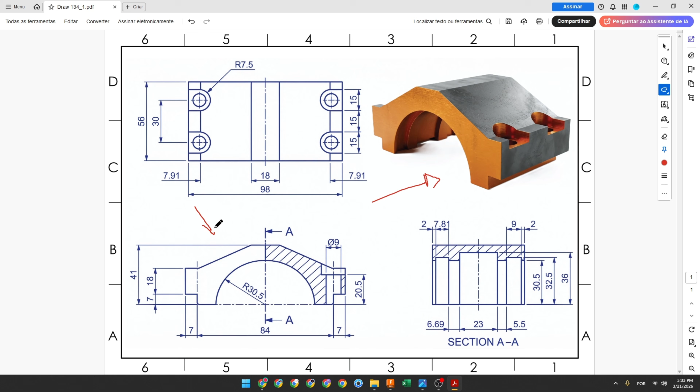The first step to create this part, we will select the front plane and create this sketch. Here will be the midpoint. And the first thing that we'll make, we will create this arc. The angle between this point and this point here is 90 degrees.

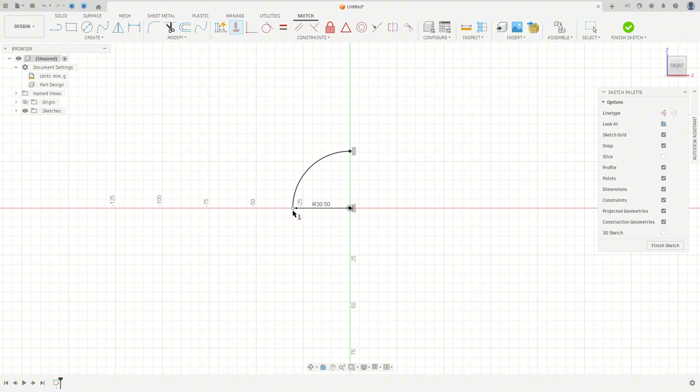So open Fusion, go to create a sketch, select the front plane, go to create, select arc, center point arc, click here in the midpoint, make an arc here with 30.5 millimeters of radius. Go to constraint, select horizontal vertical, select this point and this one, this point and the midpoint.

And now we will create these three lines, this one, and this one. This line here and this one has 7 millimeters of length, and the distance between this line here and the midpoint is 84/2. So select line, click here and this point, make a line here.

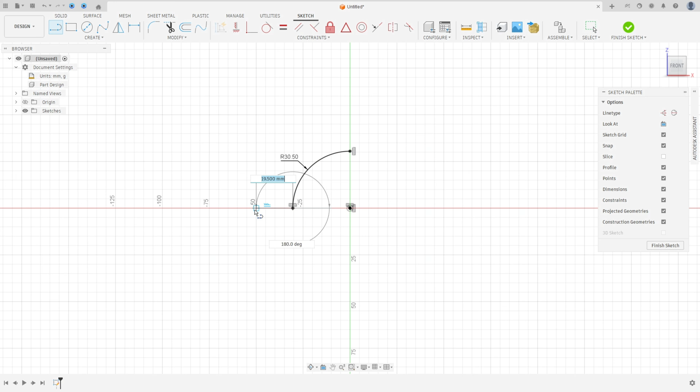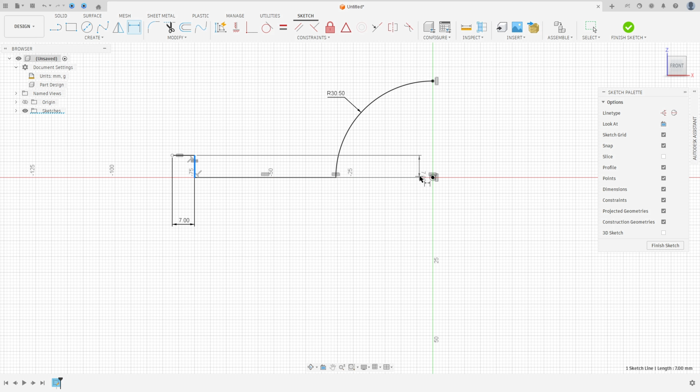Go to constraints and select equal, select this line and this one, and go to dimension. The length here is 7 millimeters, and the distance between this line here and the midpoint is 84/2.

And now we will create this line here with 18 millimeters, and we will create this line here, and the distance between this point here and the midpoint is 41 millimeters.

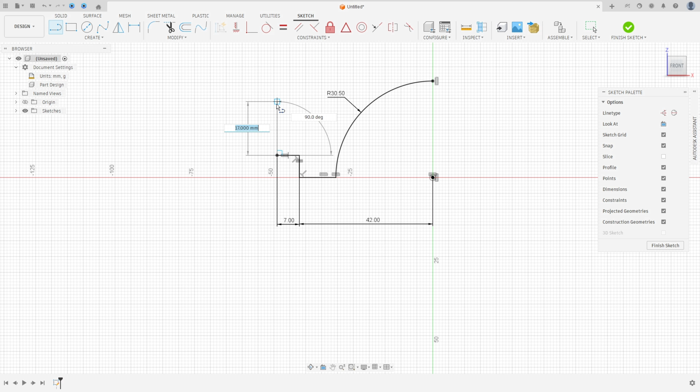So select line, click here on this point, 18 millimeters, and make a line here, and go to sketch dimension. The distance here is 41 millimeters.

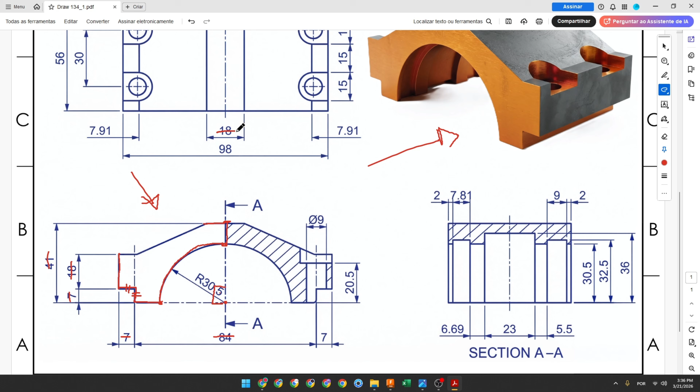And now let's create this line. This line has 9 millimeters. And this line here has 7.91 millimeters. And let's create this line here.

So select the line, click here in this point, make a line here with 9 millimeters of length. And select the line, click here in this point, make a line here with 7.91 millimeters. And create a line here.

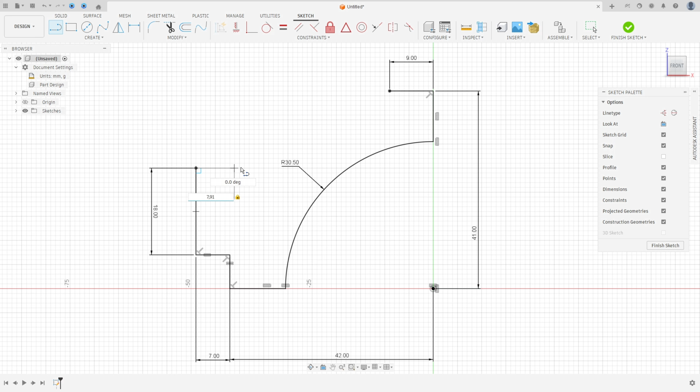Now go to mirror, select this sketch here, and the mirror line, select this one and press OK. We made this sketch. So finish the sketch here.

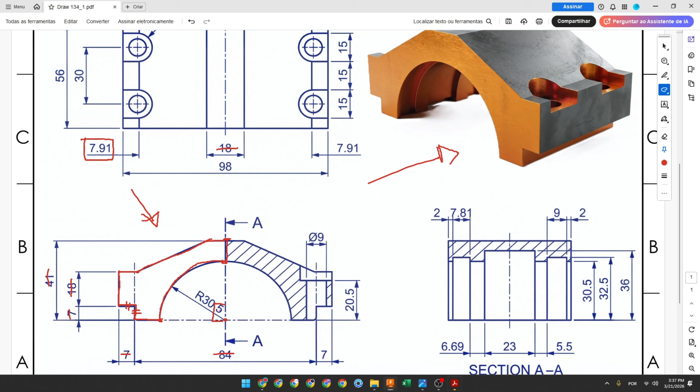We need to extrude this, and we will extrude this 56 millimeters. So go to extrude, select this profile, and the direction symmetric, measurement whole length, and the distance here 56 millimeters, and press OK.

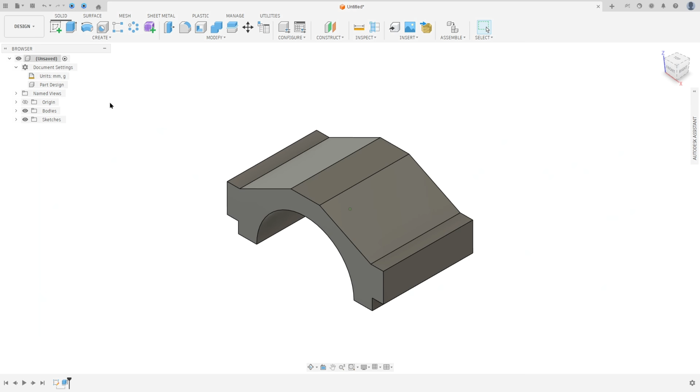And now we will create this cut here. So to create this cut, we will go to create a new sketch and select this face here, and go to create, select project include, project, the selection filter, select body, select this body here and press OK.

And select line, a construction line, make a construction line here in the center. I will hide this body a little bit. And select the line again, make a construction line here in the center.

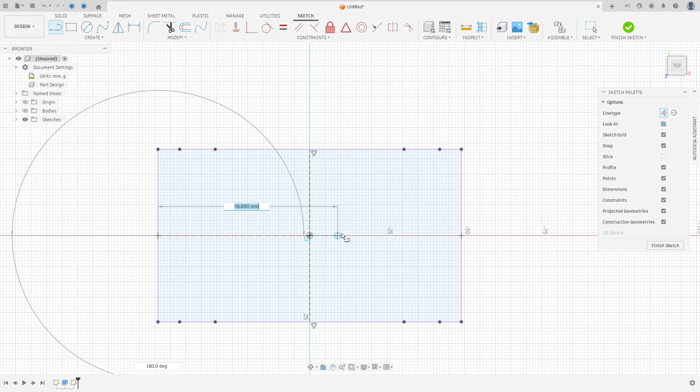And now we will create this sketch here, okay? And this circle. This circle here has 9 millimeters of diameter. And the distance between this circle and the midpoint here, or center line, is 15 millimeters. And the distance between this point here and this edge here is 7 millimeters, okay?

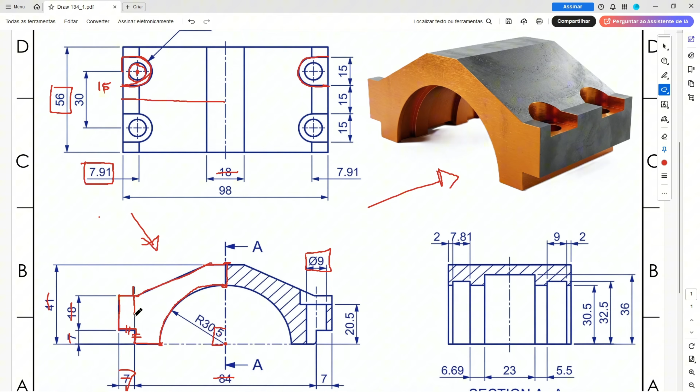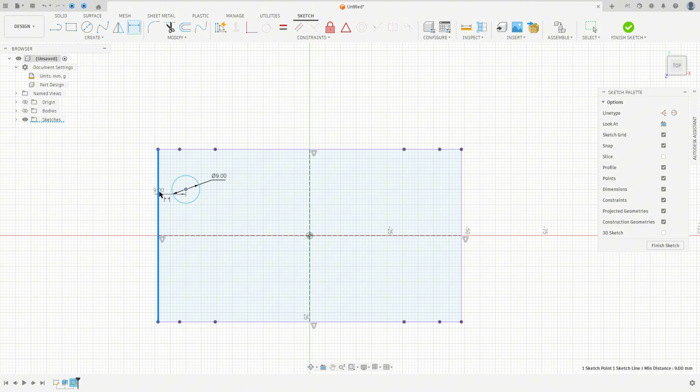It is the same line here. So select the circle, make a circle here with 9 millimeters of diameter, remove the construction line type, and go to sketch dimension. The distance here is 7 millimeters. And the distance between this point and the center line is 15 millimeters, okay?

And now we will create a line here, and we will create an arc and another line. The distance between these two lines is 15 millimeters, and this arc here is concentric with this circle.

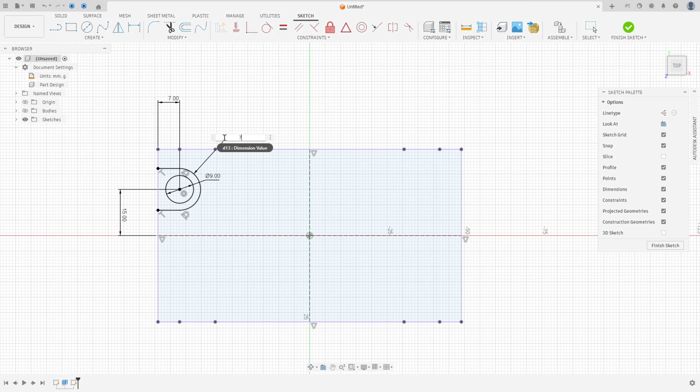So select the line, make a line here, make an arc and another line. Go to constraint, select concentric, select this arc and this circle here, and go to sketch dimension. The radius here is 7.5 millimeters, okay? Just to check the dimension, the distance here is 15.

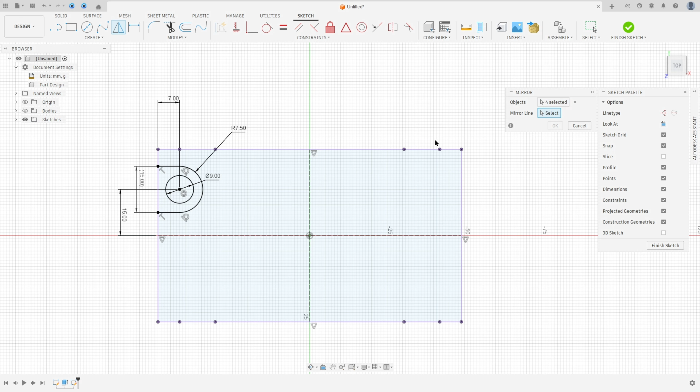And here, go to mirror and select all this profile. The mirror line, select this one and press OK. And select the both sketch here again. And go to mirror.

And the mirror line here is this vertical line. Press OK, and now finish the sketch.

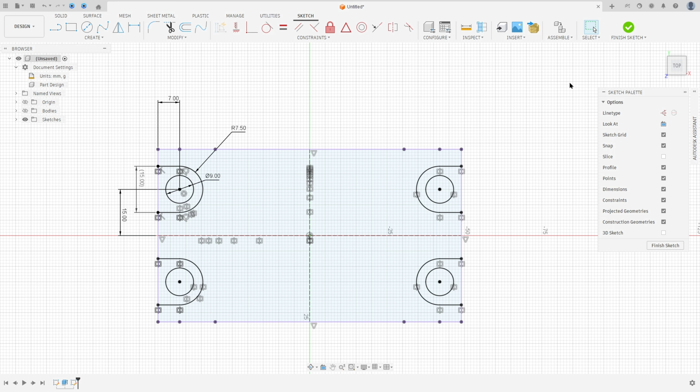Show this body here. Go to Extrude. Select this profile. Let me hide this a little bit. You can select the circle too, okay?

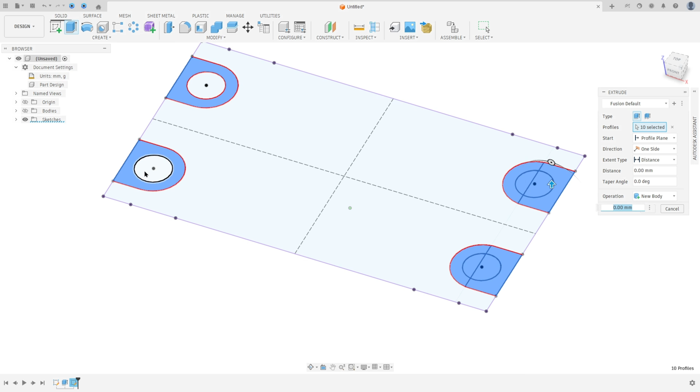And here the direction will be two sides. To this side here, we use 10 millimeters, just to cut through all here, or you can select all.

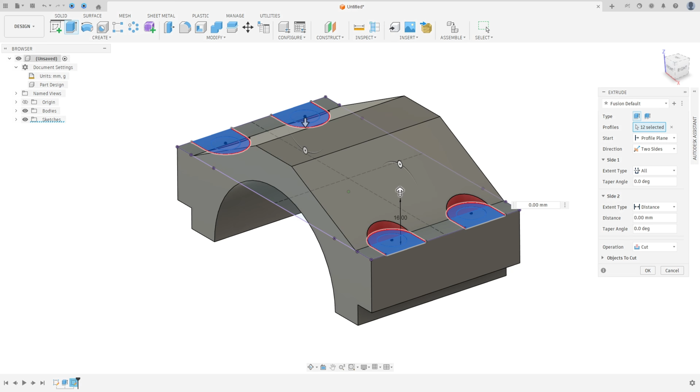And the side two will be 18 millimeters plus 7, it is 25 millimeters minus 20.5, okay? So here is 25 millimeters minus 20.5.

And press OK. Operation cut. And go to measure, select this face here and the bottom face. The distance here must be 20.5 millimeters.

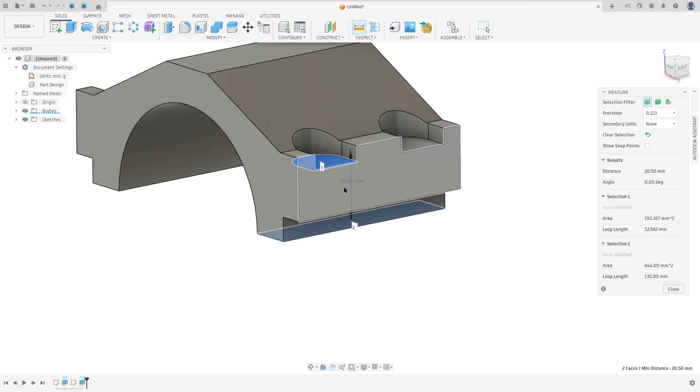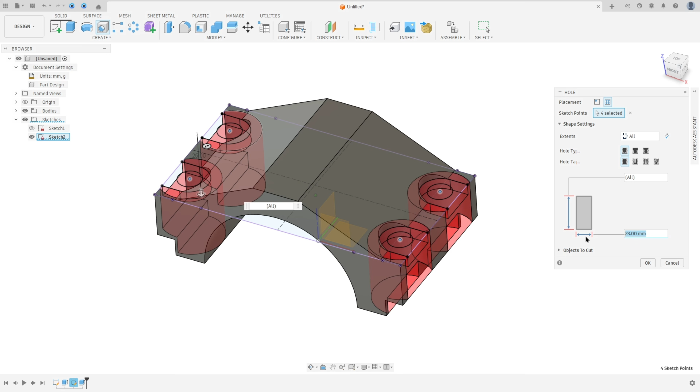Okay, and now show the sketch 2 again and go to hole and select this point here. The extent all, the hole type simple, the diameter here 9 millimeters. And press OK.

Hide this sketch. We made this one, okay?

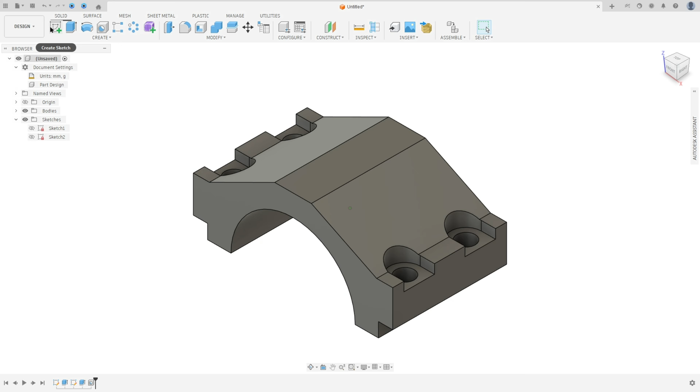And now we will select the right plane and create this sketch here. So go to create a sketch and select the right plane.

Go to create project, include project. The selection filter body, select this body here and press OK. I will hide this body. We have this profile for reference.

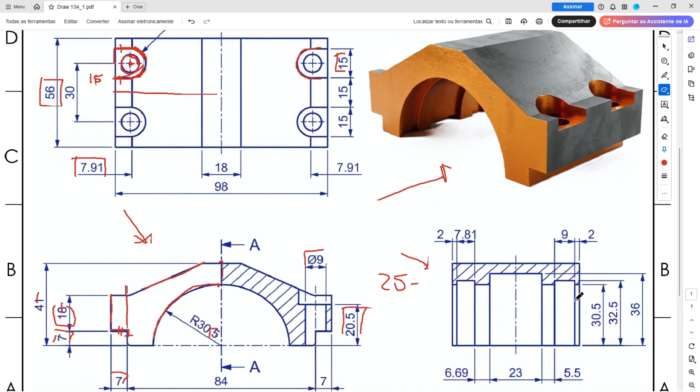And now we will create this sketch here. So we have a line here and another one here with 2 millimeters of length. And the distance between this line and the midpoint is 30.5 millimeters.

So select line, make a line here with 2 millimeters, create another line here with 2 millimeters. Go to constraint, select equal, make these two lines equal, and go to horizontal vertical, select this line and this one. Go to sketch dimension. The distance here is 30.5 millimeters, okay.

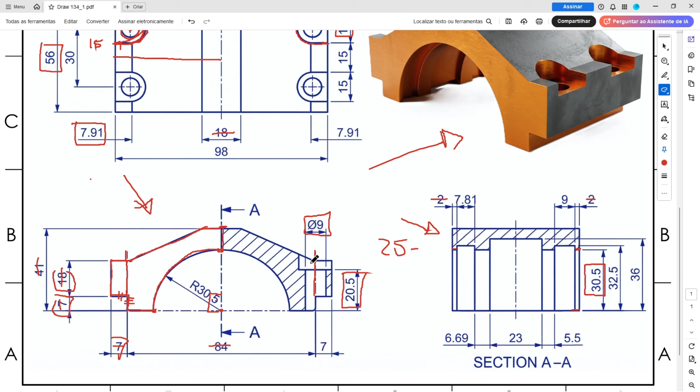And now we will create this line here, this one and this one. And the distance between this line here and the center point here is 32.5 millimeters. And the length of this line is 7.81.

So select line, click here. The distance here is 7.81 millimeters.

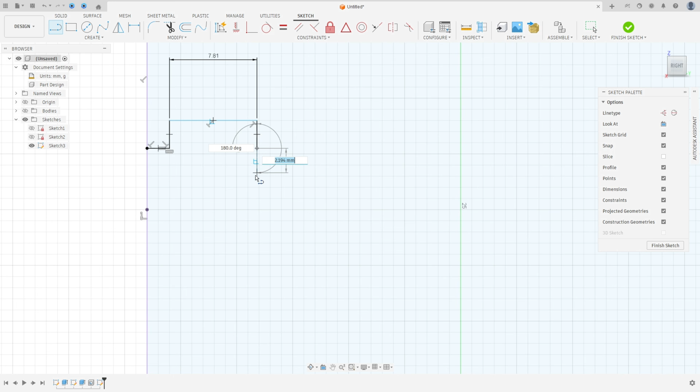Create another line here and go to sketch dimension. The distance here is 32.5 millimeters. Go to constraint, select horizontal vertical, select this point here and this point here, okay.

And now we will create this line. This line here has 6.69 millimeters. Okay.

And now we will create this three lines here. And this line here has 23 millimeters. And the distance between this line and the midpoint is 36.

Go to constraints, horizontal, vertical, select this point and this point here. And here we will create a line with 5.5 millimeters.

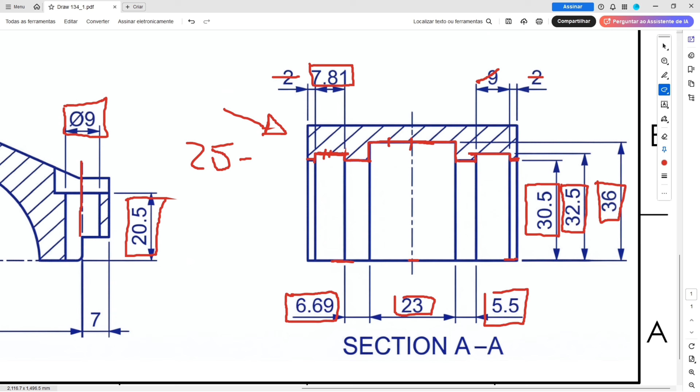So select the line, click here in this point, make a line here, a line here with 9 millimeters, and a line here. And go to constraint, select horizontal, vertical, select this point and this point here.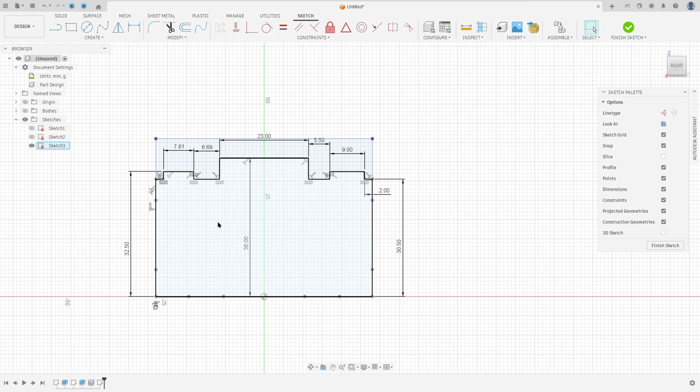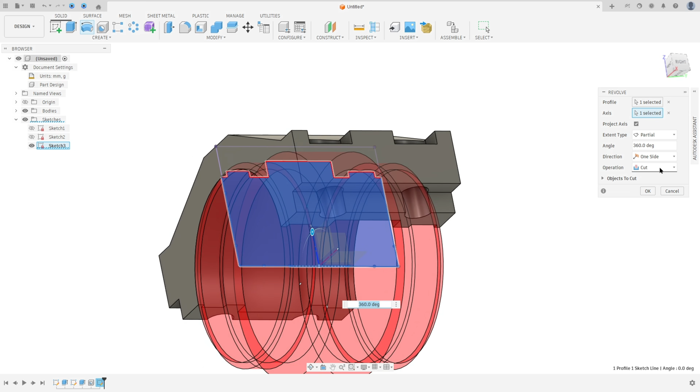Okay, we made this profile and finish the sketch. Go to Revolve, show this body. The profile, select this one, and the axis, select the center line here. The operation here is cut and press OK.

Let me make an analysis here. We made this one, so that's it. Here we finish our exercise.